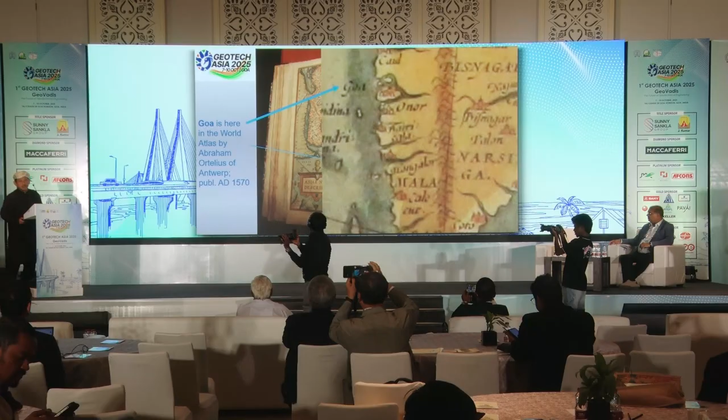Thank you very much for this invitation to this fantastic conference. So today I'm trying to show my gratitude to all organizing committee participants by using this place. This is a gift from Kunebi. So first, this is a part of my personal map collection, published in 1570 Europe, and it shows Goa clearly like this. So we are there now.

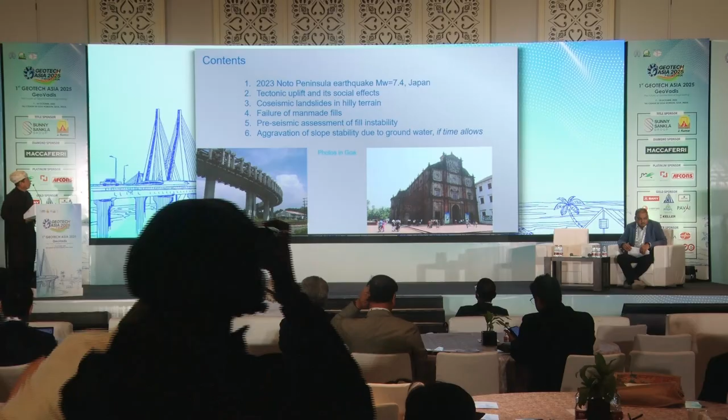And my topic today concerns groundwater effects. This topic is based on my reconnaissance of damage caused by the earthquake in 2024 in Japan. And contents are like this: earthquake overview, tectonic issues, seismic landslides, and after that number 4 and number 5 are my most important concerns. And if time is available, then I proceed to number 6.

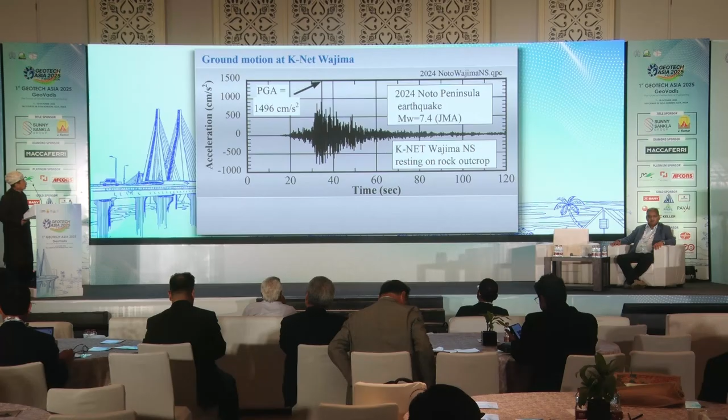So the earthquake happened in 2024 in central part of Japan. And it's a peninsula, rural area, and epicenter is over there. And I address first Wajima city briefly. So this is the ground motion observed by K-net system in Wajima, and maximum acceleration was nearly 1500 centimeters per second squared. And this is a map of Wajima city, and K-net station is located on firm ground. But there is one more station operated by Japan Meteorological Agency. This is located upon soft soil.

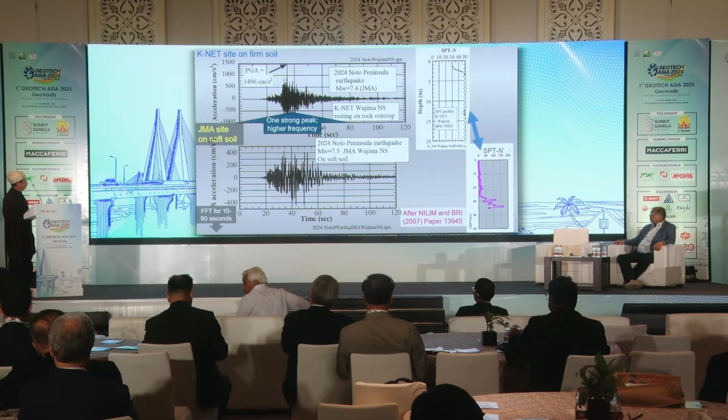So that distance is 0.5 kilometers, and it's interesting to compare motions on firm soil with high SPT N values, more than 50, against the JMA site on soft soil with very low SPT N values. And the maximum acceleration was very much different. But more interesting issue is frequency component. You can easily recognize that the lower time history is slower than the top record. So I address the spectrum by running FFT, and this is a comparison. K-net spectrum shown by blue has much higher frequency component, and JMA on soft soil has lower frequency component. So I understand that theory, soil mechanics, soil dynamics, earthquake engineering are again acceptable based on these observations.

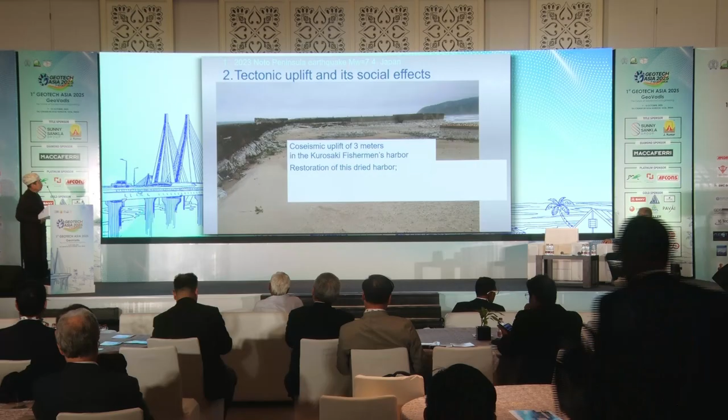Tectonics. In the 20th century, tectonics was a topic in science, geology. But in the 21st century, we encounter the problems caused by tectonics on Earth. This is one of the problems encountered last year. Uplift of 3 meters happened in this fishermen's harbor, and you see that harbor is dry. And it's a big problem to local fishermen communities. So how to restore the community? Digging the harbor bottom is understandable, but cost is a problem. Also, local communities are getting aged, older and older. So financial people claim, what is the reason to spend lots of money to support such aged communities? Aging is a big problem in Japan now, particularly in rural areas. So most small fishermen's harbors are just left like this without any clear decision.

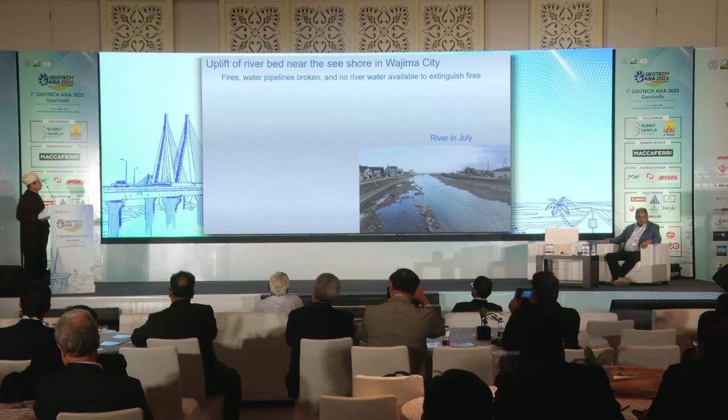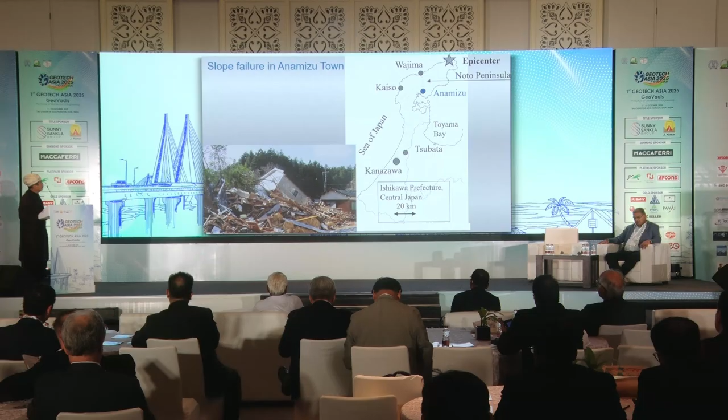And now I'm coming to the problem, the slope problem. So this is the case of Anamizu Town, and this is the consequence. And actually, there was some amount of rainfall prior to the earthquake, about 6 weeks before the earthquake. And this is a detail of the landslide. And my question was, what is there beyond the shoulder?

To date, engineers didn't worry about the construction of such sports facilities at the top of hills. Sports facilities are good for the welfare of local people, there are no questions. But now I suspect that such a big open field is bringing more rainwater into the unstable slopes.

First, there is no vegetation, so rainwater is not absorbed by vegetation. There is no transpiration. The water just remains there and seeps into the slopes. So increased infiltration occurs into the top of the slope.

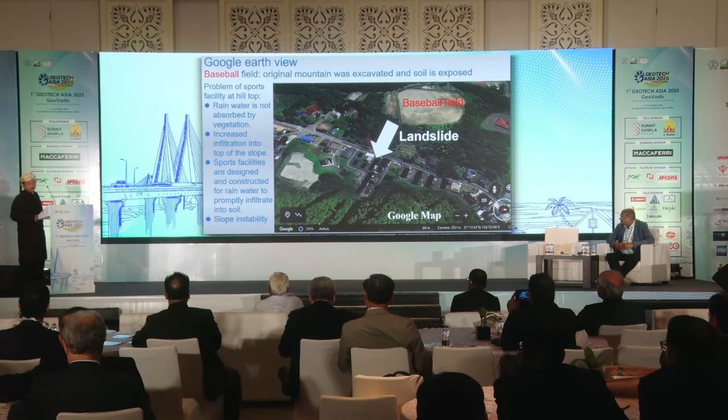Also, sports facilities are designed and constructed for rainwater to promptly infiltrate into soil, so people can start playing baseball or football, whatever, as soon as possible after rainfall. That's good for people, but for slope stability, rainwater is invited to go into the unstable slopes. That's very bad. So we have a conflict between safety and welfare of people.

So this is a view of the baseball ground one month after the earthquake, and five months after the earthquake. Still I was able to recognize evidence of fractures and cracks, also some problems. This is evidence of fracture five months after the earthquake.

And the geological strata is like this, inclined towards the failed slope. The inclination is this way, and I suppose that groundwater can easily flow along the layer boundaries into the unstable slopes. That made the slope more unstable, and then the earthquake triggered the ultimate failure.

So man-made fills cause many problems. This is the Kanazawa City site, and this is the failure of a small valley filled with soil at this high school. So there was a small valley here. It was filled with soil to make some facilities there.

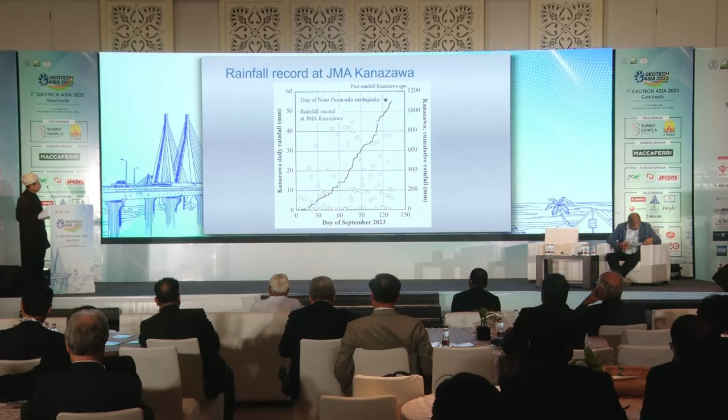I'd like to call upon these issues. What is the meaning of valleys? A valley is a place where groundwater gets together through geological structures, and water starts eroding. That's why we have low places called valleys.

So after valley filling by earth, still groundwater comes to the previous valley. So we need to drain water. That is an indispensable issue for stability. But in most cases, drainage is not enough. Or after many years, we have clogging, etc., and we don't have good drainage anymore.

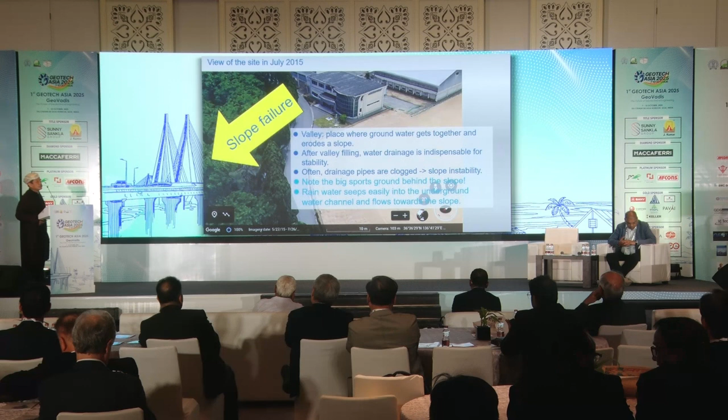So that makes the slope more and more unstable. And then a further problem was the construction of a big sports ground behind the slope. More rainwater started to come into the unstable slopes. So far, we were not aware of this problem of sports facilities.

Sports facilities have been considered good infrastructure. We never dreamed that this affects slope stability problems. Surface not covered by vegetation, that's the issue. So this open area made easy seepage of water into the slope subsoils.

Many people have been talking about liquefaction, the flow failure of gentle slopes like this, so I won't touch upon this issue. But still there are many problems for reconstruction of these communities. Not only engineering problems, but social problems are there too.

The issue is all house blocks move 10 meters, 20 meters, the shape of the site changes. So now the question is, which part of the failed slope is whose property? Registration and survey make lots of disputes among local people. Some people get more land, some people lose land. So there are conflicts. Who pays for that?

How much? Then today I'd like to talk about this Tsubata town, slightly away from Kanazawa city, where a landslide occurred in a recent urban or residential development.

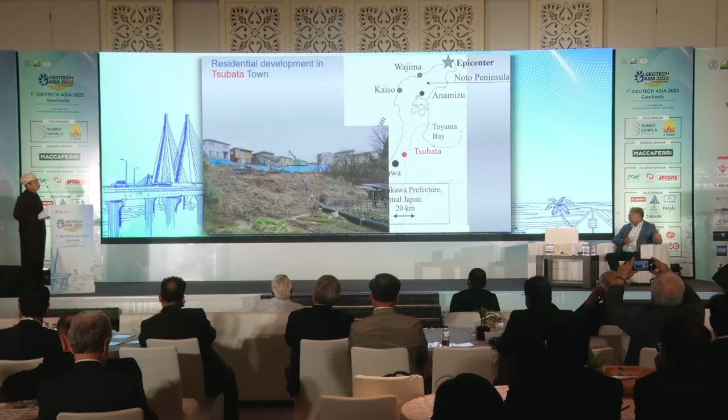I visited this site twice, one month after and six months after the earthquake, and water drainage was always still going on. You can recognize the big pipes, water pipes here. So I understood that there is plenty of ample groundwater behind this slope. Probably one of the sources of this ample groundwater is this reservoir just next to the fill.

Both the residential fill and this reservoir were constructed by stages in the late 20th century, as shown in the next slide. This is a map from 2000, and here there is a reservoir. Next to the reservoir there are many houses, that's the residential area.

And in 1980, there was nothing. It was just hill areas. So development took place between 1980 and 2000 by stages, and in that period, this reservoir was constructed here.

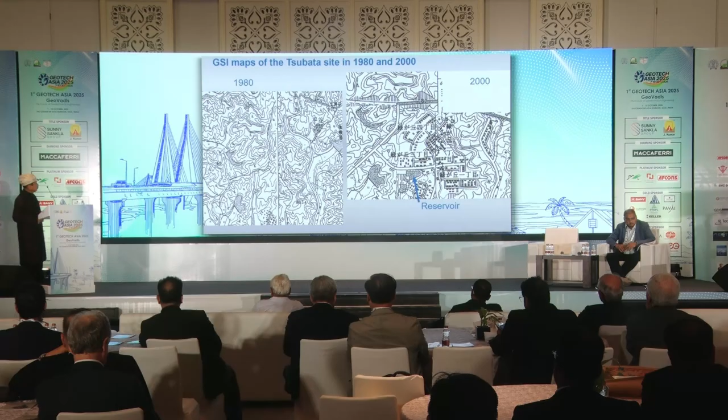So the question is, was it possible to foresee the landslide problems? My answer is yes.

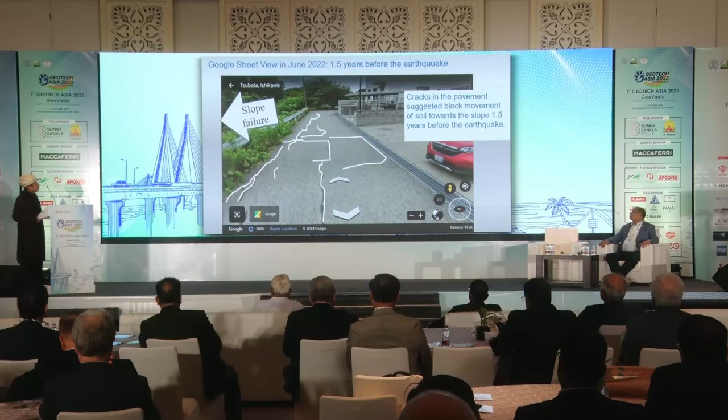I start with this red circle where the landslide happened. These views, I'm very much grateful to Street View of Google Earth - it's quite helpful to understand what happened. You can recognize many cracks on the surface of the pavement, and the shape is like this, and slope failure in that direction. So in my view, cracks in the pavement suggested block movement of soil towards the slope 1.5 years before the earthquake. If local communities or local engineers and officers were careful about the meaning of these cracks, they could say something about the future risk of landslide.

And the typical shape of the crack is something like this. It's not a closed rectangle - one side is open, and the block is moving towards the slope. And this is another side, just a boundary between the slope area and another slope facing the reservoir. So there are some cracks over there.

But more detail - now I'm looking onto the entire road along the reservoir side, and there are some, but not many cracks. The shape again is like this, and maybe this suggested 1.5 years before the earthquake some movement of the slope shoulder towards the reservoir. But fortunately, this part of the slope did not fail during the earthquake.

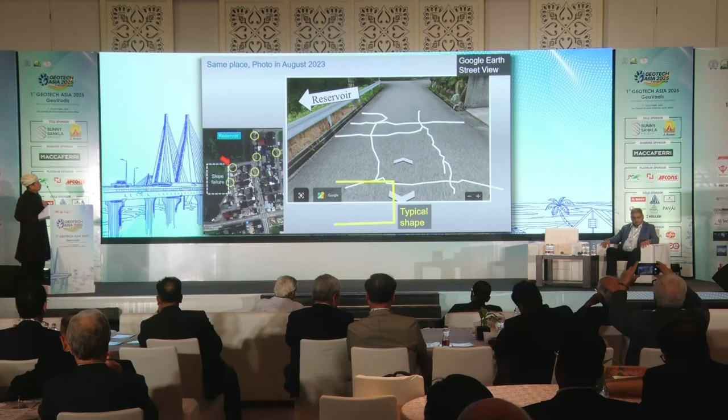One reason is stability was not so bad as in the other previous slope, as shown by the lesser number of cracks. Beyond this section, there are no big cracks anymore - there are some, but not significant. Still, the typical shape is like this. So I imagine that slope was also almost failing, but the factor of safety was 1.00001 and the failure did not happen, fortunately.

Then some people ask me, what is the clear difference in appearance of crack configuration between unstable slopes and very stable ground? So now we look at a place far from the slope, where no slope failure is possible. Still we can see some cracks, but the shape is different. This shape of a crack is a combination of this yellow dashed line and white lines, and in my view, the shape is rectangular - a combination of yellow and white. This set of cracks is caused by maybe shrinkage and subsidence, like shrinkage of pavement and subsidence of backfill. So the shape is different from the previous ones along the unstable slopes.

Let's look at another one shown by red arrows. Again we can recognize many cracks like this - this is not related with slope failure at all. Most probably this is due to subsidence of lifeline backfill soils. Consolidation subsidence occurred there, and then the surface pavement was damaged like this. The shape is never rectangular, never something like you saw before. So even if this happens, you don't have to worry about a slope problem at all.

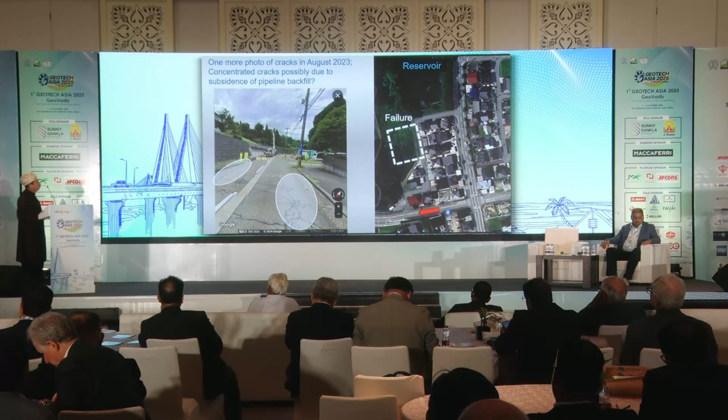So the shape of cracks is good evidence of ongoing slope instability - it's a useful signal. If this happens close to the slope shoulder, then we have to do something to maintain the stability or avoid future earthquake landslides.

And then, limitations. Actually, groundwater has been a big issue in the history of geotechnical engineering mechanics.

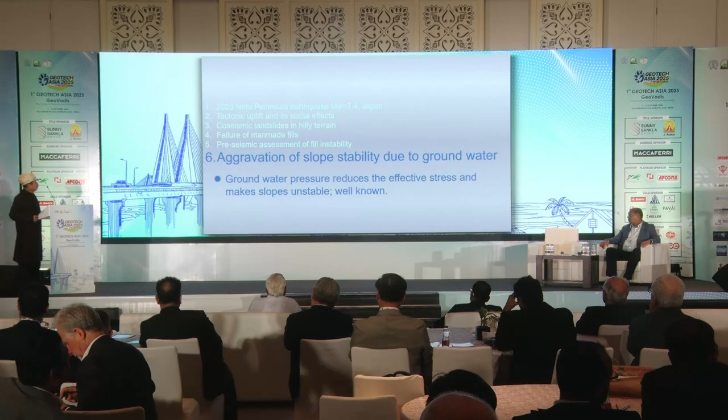Many disasters happened, and mostly our attention has been paid to slope instability problems. But actually nowadays groundwater is showing more problems to our communities. The mechanism of failure is always clear - groundwater pressure, water pressure reduces the effective stress and makes slopes and ground unstable. That's well known. And this negative effect is sometimes unexpectedly serious.

For example, this is a classical example of slope failure in Vajont Dam, Italy, 1963. And this is a consequence - 2,000 people were killed at midnight. This is the Vajont Dam that I visited in 2010. And this is also another interesting picture, Vajont Dam reservoir before failure. So as water level came up, water pressure in the slope increased and the shear strength was lost, and a 200 million cubic meter landslide happened, jumped into the lake and caused a tsunami. So this is the consequence.

But nowadays, we have reservoir-induced seismicities, and India is actually the first observer of this type of disaster. I visited this site in 2016, and it was not an easy trip, but anyhow I was able to take these pictures. Our community should have learned lots of lessons from the effects of reservoir-induced pore pressure rising.

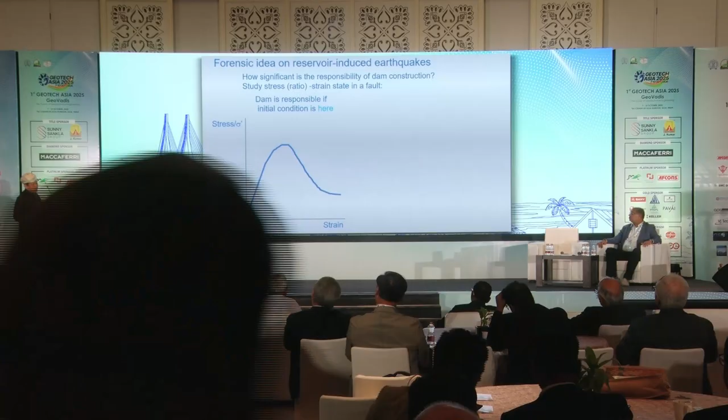So let me plot shear stress over sigma dash versus strain. This is typical fault behavior. We have big stress, failure, and then stress goes down to residual levels. So, is the dam responsible? If the initial conditions are here, at the bottom of the stress-strain relationship, under normal conditions the factor of safety is high enough.

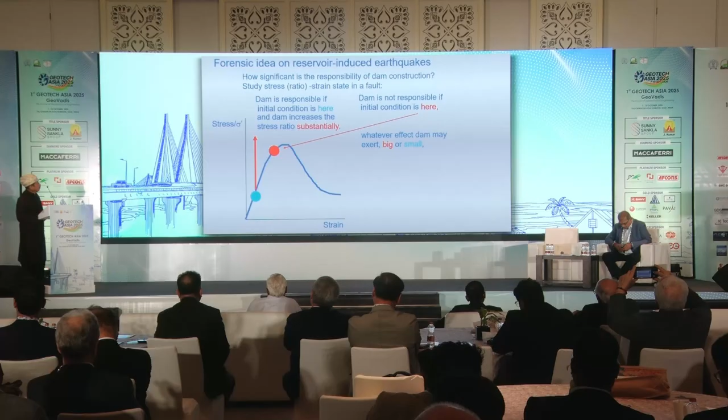And if the dam increases the stress ratio substantially, like this, failure happens in the fault, and the dam is responsible for the disaster. But the dam is not responsible if the initial conditions are very close to the peak stress. Whatever effect the dam may exert, big or small, sooner or later the fault would have ruptured. So the responsibility of the dam construction is much less than in the other situation shown on your left-hand side.

So when discussion starts about the responsibility of dam construction, in order to avoid unnecessary long discussions, we have to show which is the case in reality. So if you plan dam construction in any area, it's very important to do earthquake monitoring. It's very important for owners of dams to start earthquake observations before construction, before impounding reservoirs. You should show which was the case before the reservoir impounding—the blue one or the red one.

Today, our projects span the whole of India, starting from Barmer, Rajasthan. Our team fought extreme heat and sandstorms to install 13,500 piles within a 10-month schedule. Keller accomplished the job, utilizing 9 hydraulic rigs, 10 conventional rigs, and 2 batching plants, ensuring seamless progress despite the harsh conditions. This effort laid the foundation for a new generation refinery and petrochemical complex designed to meet India's growing demand for oil and petroleum.

In the vibrant city of Noida, Uttar Pradesh, Keller undertook the challenge of providing foundation solutions for a landmark commercial center that will soon house luxury hotels, a sprawling mall, and dynamic meeting spaces. This complex project required a blend of 6 techniques: diaphragm wall construction, anchoring, soil nailing, shotcreting, piling, and excavation.

In Khavda, Gujarat, Keller played a key role in the development of renewable energy power, a major step forward in India's green energy initiatives. To provide a stable foundation for this project, we installed 190,000 meters of vibro stone columns. Working in a remote area, we maintained operational excellence and efficiency, completing 19,000 cubic meters of granular blanketing with remarkable speed, laying the foundation for a renewable energy hub that will power a cleaner future for Gujarat and beyond.

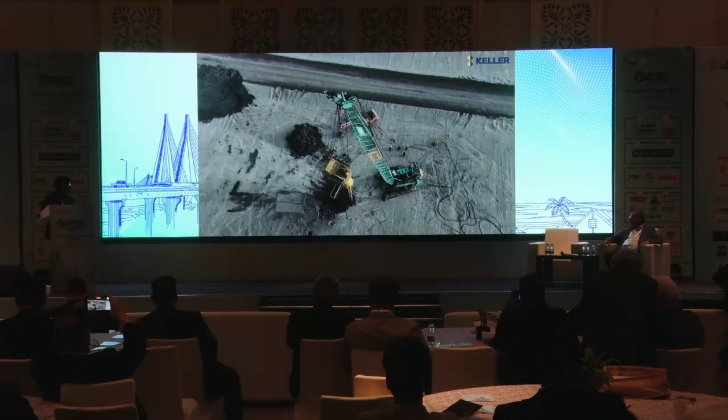At Mundra, Gujarat, Keller is currently tasked with laying the foundation for a massive polyvinyl chloride plant, one of the region's most significant industrial projects. To meet the demanding requirements, we are in the process of executing 30,000 bore piles and installing 5 lakh meters of vibro stone columns. Our team is utilizing 20 piling rigs and 6 vibro setups to ensure efficient progress. This large-scale project showcases Keller's expertise in delivering robust solutions while maintaining timelines and supporting the ongoing growth of Gujarat's industrial landscape.

In Jagiroad, Assam, Keller is contributing to one of India's most ambitious initiatives under the National Semiconductor Policy. Tata Electronics is developing a state-of-the-art semiconductor assembly and testing facility, a project that will place India firmly on the global semiconductor map. To lay the foundation for this world-class facility, Keller is executing 8,000 plus bore piles, each up to 22 meters deep, along with pile testing, excavation, pile chipping, pile cap, and pedestal works. At peak, 21 piling rigs and 22 cranes were deployed, and our team is delivering this large-scale scope in a fast-track schedule. Once complete, this assembly and test facility will stand as a milestone in strengthening the nation's electronics manufacturing ecosystem.

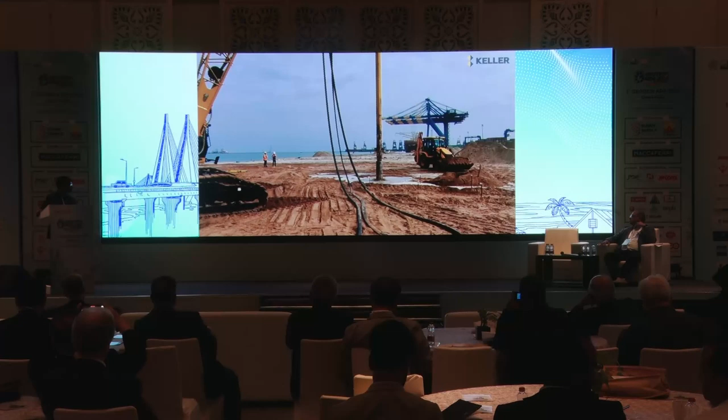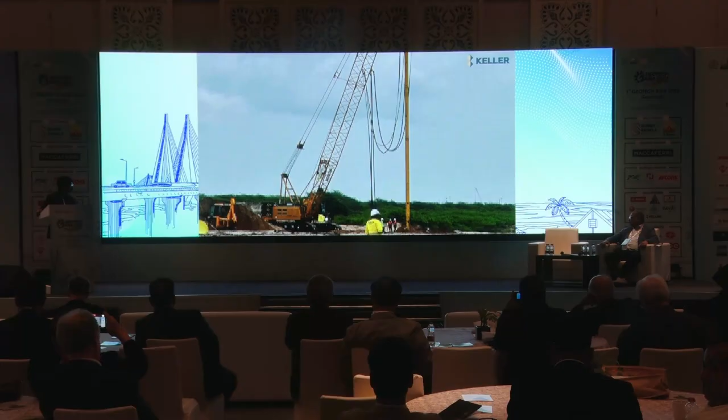At Ennore, for Adani Ennore Container Terminal, AECT, 30 kilometers north of Chennai Port, Keller is engaged in developing the container berth terminal by executing diaphragm wall, barrette piles, bore piles, and deck works. On completion of the works, as it is located strategically, the project offers congestion-free seamless cargo movement, enhancing the economic activity in the Chennai-Bangalore Industrial Corridor.

Our vision is to be the leading provider of specialist geotechnical solutions, to lead in expertise, quality, product range, and customer service, and to consistently outperform our competitors. Putting this into practice are 3 core values: integrity, collaboration, and excellence.

At Keller, safety, quality, and sustainability are at the heart of everything we do. We are committed towards a zero-tolerance policy for avoidable harm through proactive risk management and continuous improvement. These empower us to deliver safe, high-quality foundation solutions across Asia and beyond, building not just structures, but trust and a sustainable future. Our sustainability approach is centered around Keller's 4 Ps: planet, people, principles, and profitable projects. Thus, through continuous improvement, we strive to make a positive impact on society and the planet.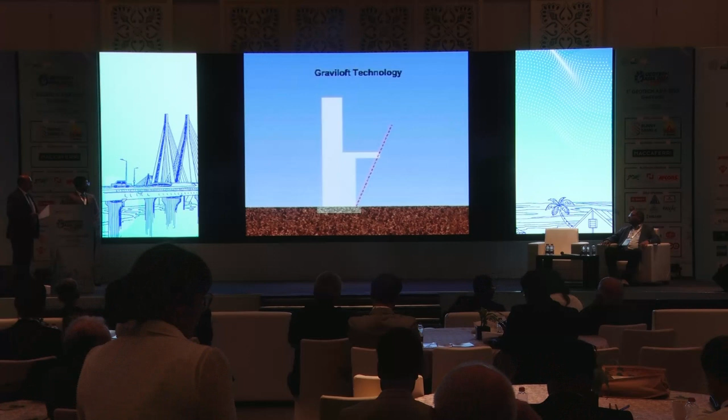Then, construction of the wall is carried out in stages with the process of simultaneous backfilling. Once the construction of the wall reaches the designed height, an RCC loft is laid like casting of a raft on the already placed backfill. Now is the crux of this technology. The erection of this loft into the failure plane breaks the shear failure pattern, giving birth to a new shear failure plane, which originates from the intersection of the loft and the new retention surface. The balance construction of the wall and backfilling is then carried out.

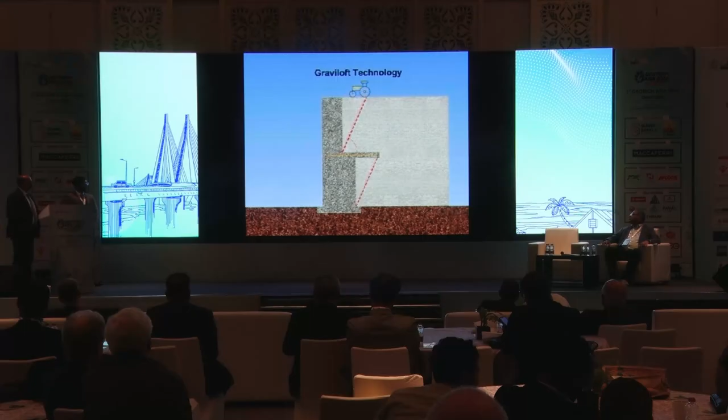In multi-loft Graviloft construction, for heights of more than 6 to 7 meters, multiple Gravilofts can be provided accordingly. This merit gives Graviloft technology utility for much greater heights. Interestingly, as the height of retention increases, the percentage of saving due to adoption of Graviloft walls increases.

When there is no loft, the lateral earth pressure diagram is a single triangle, and base pressure distribution is triangular, giving more pressure intensity towards the toe. In Graviloft technology for a single loft, earth pressure is in the form of two reduced triangles, and the pressure is either uniform or trapezoidal, which exploits the full bearing capacity of the foundation and eliminates the possibility of tilting or uneven settlement. The backfill, which is responsible for generating lateral thrust in Graviloft walls, is the unstable soil mass above the shear failure planes.

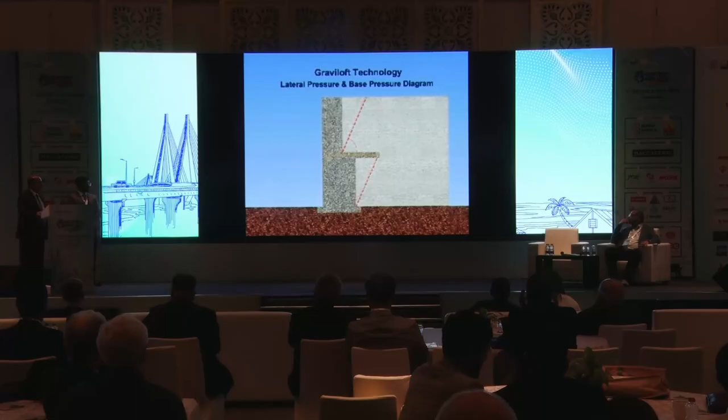I'd like to proudly mention that the next video is an outcome of our continuous research journey. And Mallar, after his graduation from UC Berkeley, has added a feather in our organization, and that is nothing but the next generation, please.

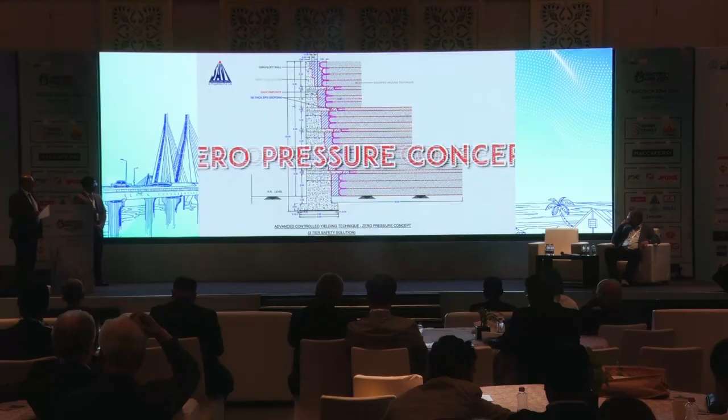Savi Infrastructure and Properties Private Limited, holders of Graviloft technology, are exclusive retention solution providers for the last 21 years. They had come up with a proposal for a 3-tier safety solution, namely Advanced Controlled Yielding Technique, Zero Pressure Concept, with due consideration of the importance and solidity or sound solution desired.

In this technique, the retaining wall is designed for various factors of safety with Graviloft technology as the first tier of safety. In the second tier of safety, provision of the wraparound technique yields strength to the backfilled material, resulting in minimization of lateral thrust on the wall. In addition to this, provision of geofoam EPS 150 between the Graviloft retaining wall and the wrapped-around backfill will act as a buffer or cushion to create a zero pressure effect on the wall as the third tier of safety.

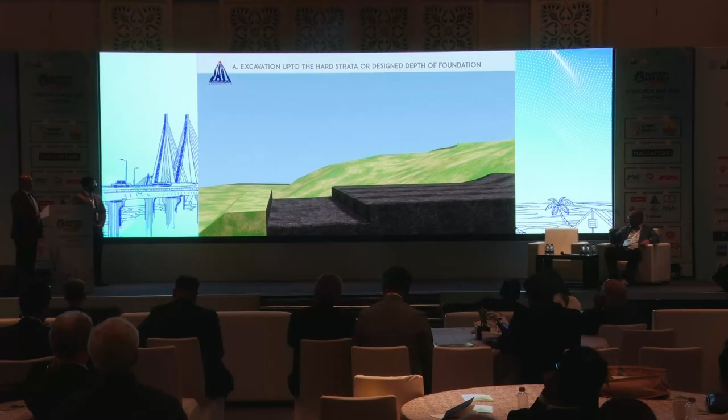This graphical presentation is to elaborate the methodology of construction as follows. Excavation up to the hard strata or designed depth of foundation. Laying lean concrete for leveling. Casting of the raft as per design. Casting of the first lift with provision of weep holes. Fix geocomposite as filter media for the first lift height on the backfill side.

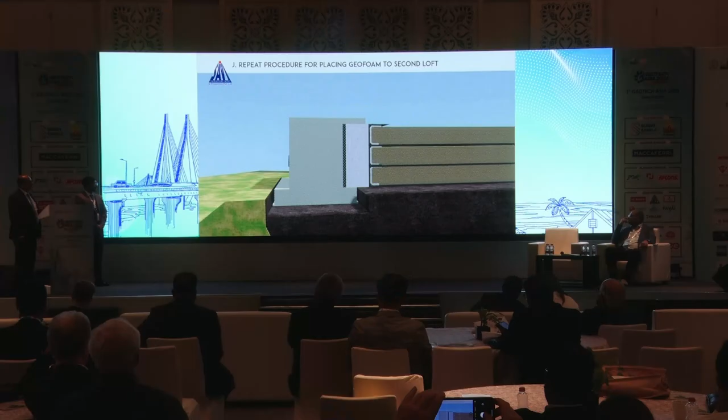Place geofoam EPS, laying of a geogrid and geotextile. Backfilling in layers to a height of 1 meter, watering and compacting to the desired density. Wrap around the geogrid and geotextile. Repeat the procedure for placing geofoam up to the second loft. Cast the RCC loft as per design. Repeat the procedure with casting of the next lift of the wall to achieve the desired height of the proposed retaining wall.

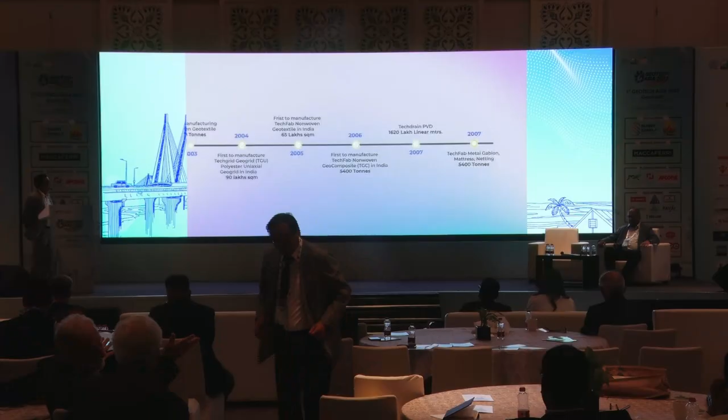TechFab India has been servicing the nation since 2003 by aiding the construction, design and implementation of dependable, cost-effective and easy-to-build infrastructure with world-class geosynthetic goods and geohazard mitigation services. From humble beginnings, while setting up the manufacturing facility for woven geotextiles in Silvassa and Daman, and rockfall protection system in Haridwar, we have rapidly grown to become the largest manufacturer of geosynthetics products and geohazard mitigation systems in India today. TechFab India, through their commitment, capability, enthusiasm and the willingness to do things differently, have achieved incredible results for clients through the years.

TFI started exports to a global market and carved a prominent niche as a prime manufacturer with its array of unique products. The vision is to offer excellent quality products and services and thereby serve the growing needs of infrastructure development in India. At the heart of geosynthetic activity and at the heart of geohazard mitigation activity lies our intense persistence to innovate and introduce world-class products every year. We are the only Indian company manufacturing the widest range of products. Even when it comes to international markets, only few offer such a diverse and dynamic range, and thus TechFab India stands out.

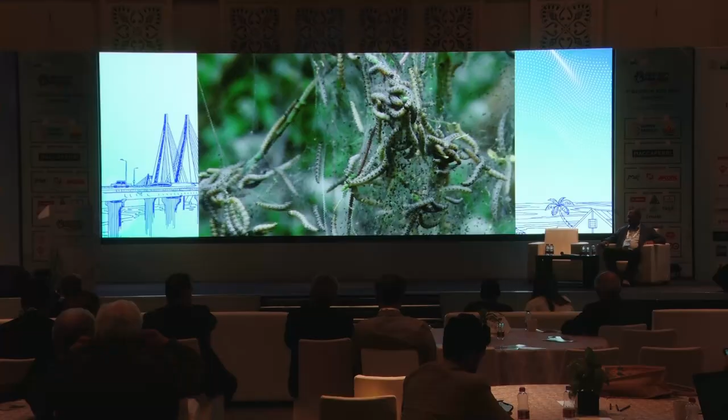To meet the needs of the present without compromising the future, infrastructure must evolve. It must become smarter, more efficient, and above all, sustainable. This is especially critical in areas like rockfall mitigation and coastal protection, where infrastructure not only supports human activity, but also stands on the front lines of natural hazards. By adopting eco-friendly materials, low-impact engineering, and nature-based solutions, we can design protective systems that are both effective and environmentally responsible. Sustainable infrastructure isn't just about building stronger, it's about building wisely, in harmony with the environment, and with a long-term vision for resilience and balance.

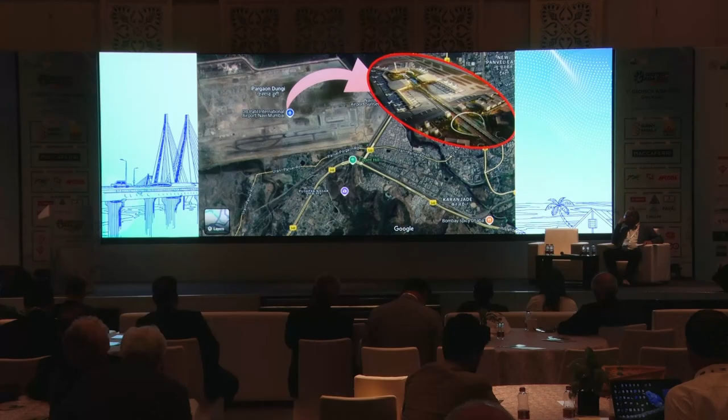A shining example of this commitment is brought to life by the Garware Design and R&D team, which proudly presents its advanced rockfall monitoring system, RODLAMS, successfully implemented for CIDCO, a government body tasked with the monumental challenge of delivering Mumbai's most anticipated second airport. The very first obstacle was relocating 2,786 households across 10 villages. The only available site was a vast, abandoned quarry with unstable, unprotected slopes, boulders, and scree presenting hazards in residential zones adjacent to former mining rock cuts. Hence, mitigation measures are critical to ensure safe and sustainable infrastructure development.

A serious safety risk to residents, CIDCO allocated 20 crore rupees for installing rockfall safety nets to prevent falling debris. Garware is honoured to have been chosen to carry out the prestigious and extremely challenging work by CIDCO. Garware in this project has successfully accomplished an exceptional feat by completing over 3,000 running meters of anchoring, drilling through one of the most dense and unyielding basalt bedrock formed by extensive volcanic eruptions that created the Deccan Traps between 68 and 60 million years ago, and laying over 8,500 square meters of drapery consisting of double-twisted hexagonal mesh and high-strength boulder net.

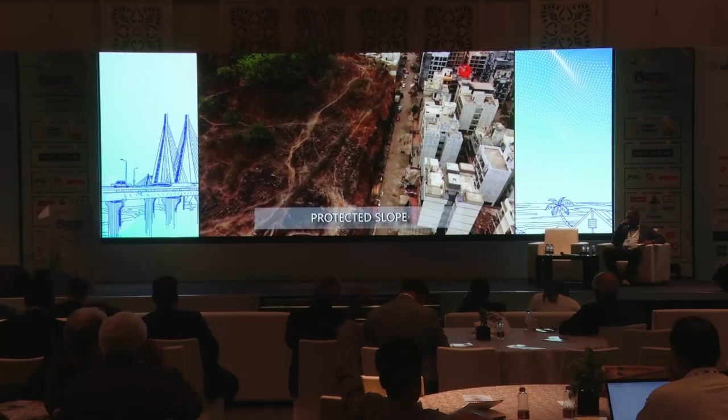The project presented its own unique set of challenges, including steep slope, hard-to-reach working areas and harsh climatic conditions, but through meticulous planning, seamless coordination, and a commitment to safety with zero reported incidents, Garware successfully completed the monumental task in a record time of just 6 months. In a landmark move for rockfall protection, Garware unveiled RODLAMS, the innovative early warning system in this project, setting a new benchmark in slope safety.

By harnessing real-time data and advanced sensors, RODLAMS delivers early warnings and rapid response capabilities with unprecedented precision. When paired with conventional drapery, it becomes the ultimate safeguard, protecting lives, infrastructure, and the environment with a level of reliability that's truly the cherry on top for modern rockfall mitigation systems. Garware's RODLAMS system, integrated with conventional rockfall drapery, sets a new standard in slope protection and monitoring.

Featuring IoT connectivity and a machine learning module, it enables real-time remote monitoring with minimal maintenance. Developed by Garware and certified by IISc Bangalore, it marks a key milestone in infrastructure safety. Now fully deployed, RODLAMS is transmitting live data to CIDCO, enhancing early warning and proactive risk management.

The core of the early warning system is an advanced sensor interface that continuously captures real-time data on slope displacement and stress variations. This data is visualized through dynamic graphs, allowing engineers to track trends, identify anomalies, and respond proactively. The intuitive dashboard translates complex sensor outputs into actionable insights, enabling timely alerts ahead of potential rockfall events.

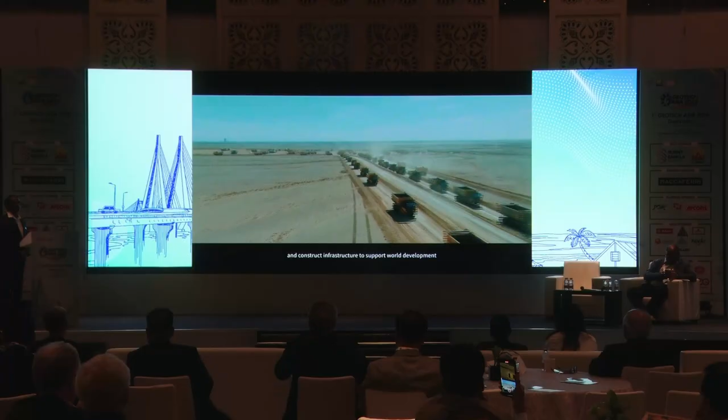In August 2002, 2 motor graders were shipped to Morocco, marking the beginning of our global journey. After more than 2 decades of diligent effort, our overseas sales have steadily risen. In 2023, our overseas sales revenue reached $7.3 billion, accounting for nearly 40% of the total income. In over 180 countries and regions worldwide, we have established more than 1,700 service outlets, 900 spare parts warehouses, and 4 R&D centers. Outside China, SANY has built 15 industrial bases in places including the US, Europe, India, Brazil, and Indonesia, and 46 intelligent manufacturing plants around the globe, 2 of which have been rated as lighthouse factories by the World Economic Forum, enhancing our global manufacturing capacity.

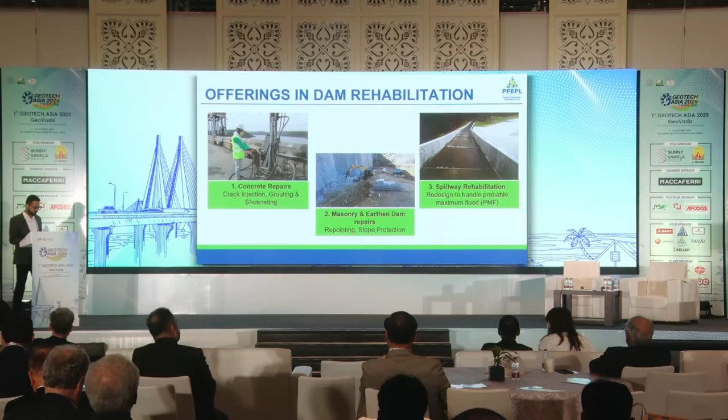We provide construction and rehabilitation solutions for aging dams, where we do concrete repair works, leakage prevention works for masonry and earthen dams, and spillway rehabilitation works. We have been working with WRD Maharashtra on some of the major dams in the region, where we have done pressure grouting and curtain grouting measures for seepage control.

Some key projects I would like to highlight - this is very important, and we like to present it across all of these case studies.

The one you see right now on screen is a 10,000 kilojoule rockfall barrier. This was the first in Asia to be installed at a height of 70 meters above the road level. The access road was very narrow, just a 2-lane road with difficult terrain, in the region of Malshej Ghat in Maharashtra, where you have excess rainfall because it's in the Konkan region. It was an extremely challenging project.

This is one of the most challenging projects and terrains we have worked in. We were successfully able to install and get the solution in place, because there were a lot of landslides and rockfalls happening in this region, with multiple incidences of a state transport bus being washed off because of a boulder that had come from the top. Our solutions have been working and preventing such disasters.

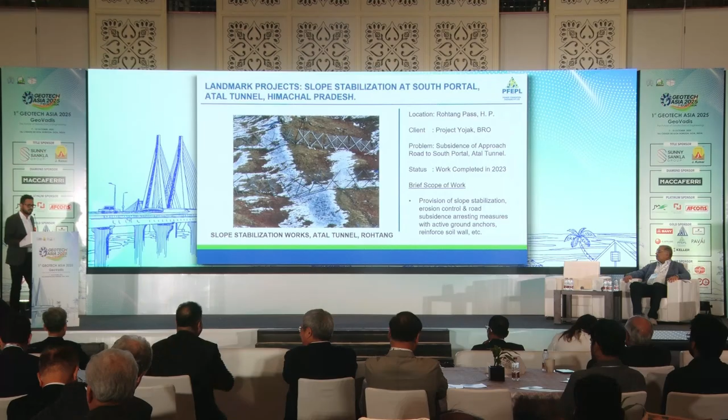The third one is another remarkable achievement - Asia's tallest hybrid earth retaining structure, standing at 102 meters high. This was at Tindharia, West Bengal.

As you know, Himalayan mountains are primarily baby mountains, and they collapse easily. So this was a notorious site where the entire mountain was moving. That's where we came into the picture. We started the analysis, came up with a detailed plan, and went right from the bottom to the top, securing the entire landmass with a structure built with rock anchors, along with other hybrid retaining structures built around the area.

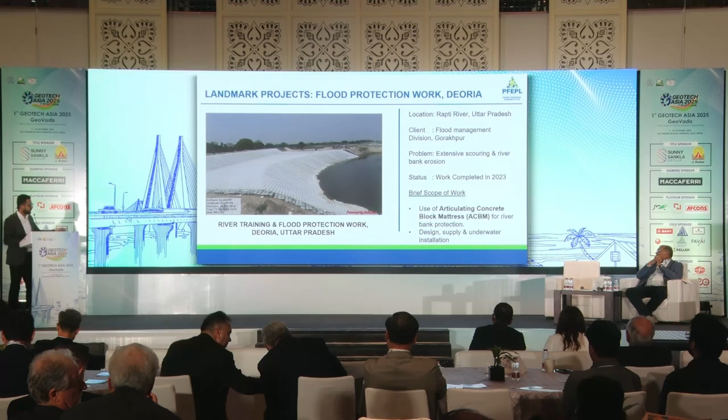Just a couple more projects - we have done Arunachal, and leakage control measures for Tengar Dam and Bhatsa Dam, where we successfully covered leakage prevention works. And some river erosion control measures back in UP, where we carried out bank erosion control measures. Thank you so much, it was great presenting in front of you.

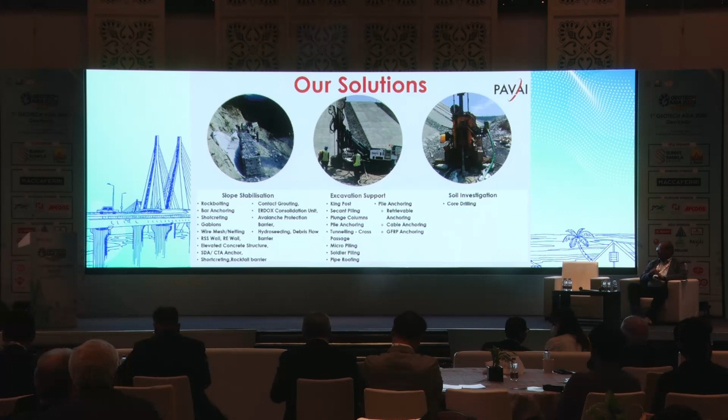PAVAI offers core geotechnical services, including slope stabilization, excavation support, and soil investigation. These are critical for ensuring structural safety and long-term stability in challenging terrains. At PAVAI, we enhance ground performance by improving bearing capacity, controlling seepage, and protecting the environment. Our solutions ensure stronger foundations and sustainable project outcomes. We serve infrastructure across highways, railways, tunnels, power, water, and defense sectors throughout India.

PAVAI began its journey in 1976. Over the years, we've steadily evolved into a trusted name in geotechnical engineering, serving national infrastructure needs. Our growth is marked by milestones of innovation, expansion, and excellence in execution. Over the years, PAVAI has achieved remarkable milestones.

Made in India, made for India. At PAVAI, our commitments define who we are. Over the years, PAVAI has earned the trust of some of the most respected names in the industry. Every project we deliver is a reflection of our expertise, precision, and dedication. At PAVAI Infra Geotech, where PAVAI means change, every challenge becomes an opportunity to create transformation. We believe that every structure we strengthen contributes to building a stronger nation. Each image you see here represents not just engineering, but effort, innovation, and excellence.

PAVAI Infra Geotech is a trusted name in geotechnical engineering, delivering end-to-end solutions for infrastructure projects. With decades of experience, we are known for our reliability, quality, and commitment to client success. Thank you for your time. For collaborations or more information, connect with us at www.provigeotech.com.

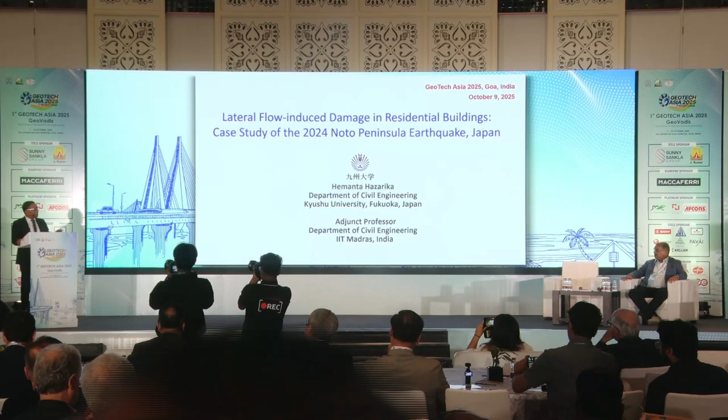Good afternoon to all of you. First of all, I'd like to thank the organizing committee of Geotech Asia 2025 for providing me this opportunity to deliver this lecture on the earthquake in Japan in 2024. Before I start my lecture today, okay,

there is a legendary artist and singer called Zubeen Garg from the northeastern state of India, Assam, where I come from. On September 14th, after 3 years of no connection, I got a WhatsApp message from him saying that there is an earthquake in Assam, in Guwahati.

And I had a communication with you. I showed you some of my private communication, some of which I deleted. This is the message from him on September 14th.

Why I'm talking about this today is that he was very much concerned about earthquake resilience of our country's infrastructure. He always encouraged me to do something for the state and the country, and always talked about earthquakes with me. He was also a very influential person in state politics.

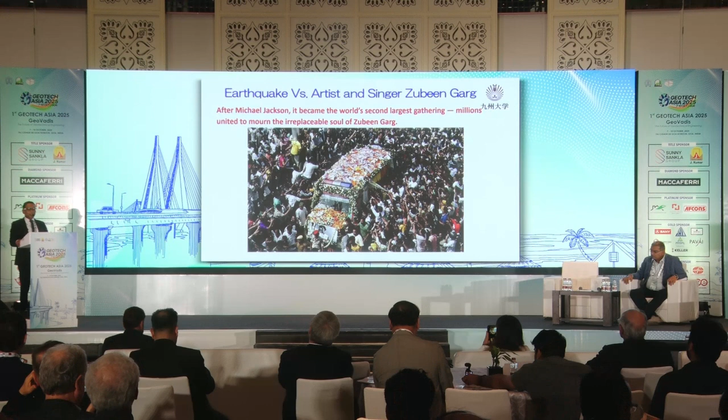This is very interesting. Just 3 days ago, 20 different people sent me this Facebook post, which I wasn't even aware of. In this interview he talked about earthquakes. He talked about me. He talked about Japanese culture and Japanese wives, because my wife is Japanese, so he knew about that well. That's probably the reason he talked about it. I'm very glad to share this.

I have a special request to all of you here. If you can spare 30 seconds of your time, please stand up to show our condolences to the family and for his departed soul. I'll say start, and then you can begin. Okay, thank you. Please start.

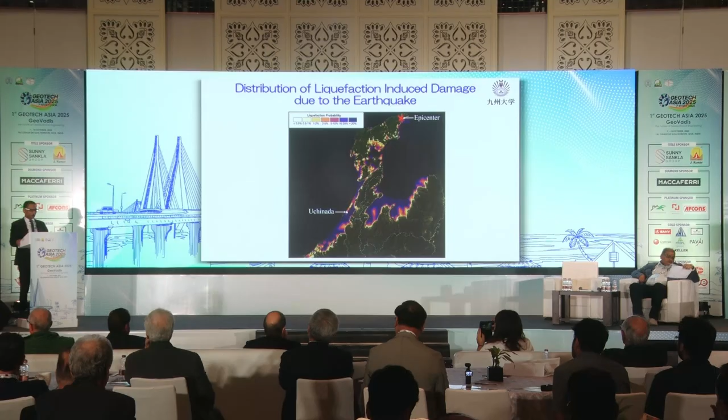This shows the distribution of liquefaction affected areas. You can see there are many areas around Ishikawa prefecture, where the epicenter is located, and in the nearby Niigata and Toyama prefectures, which had lots of liquefaction-related damaging failures.

So we decided to form a forensic investigation team under my leadership, with academia, industry, and government. These are my colleagues. I think Professor Matsumoto might be here. He is from Ishikawa prefecture, so he helped with the logistics of my team.

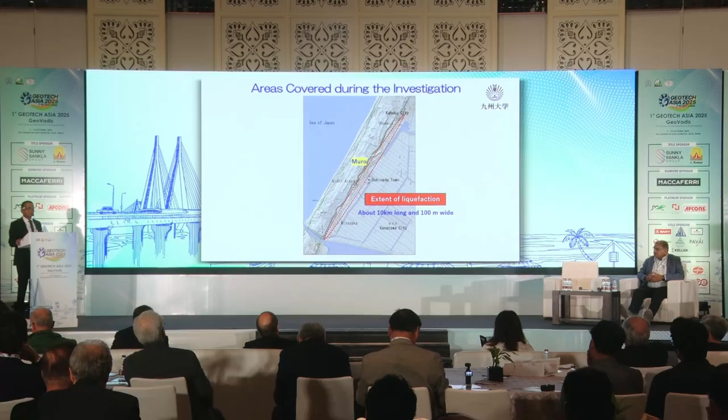We performed two investigations, once in February and once in August. We especially focused on liquefaction-related damage in Uchinada town, about 100 kilometers from the epicenter. You can see the extent of the liquefied area, about 10 kilometers long and about 100 meters wide.

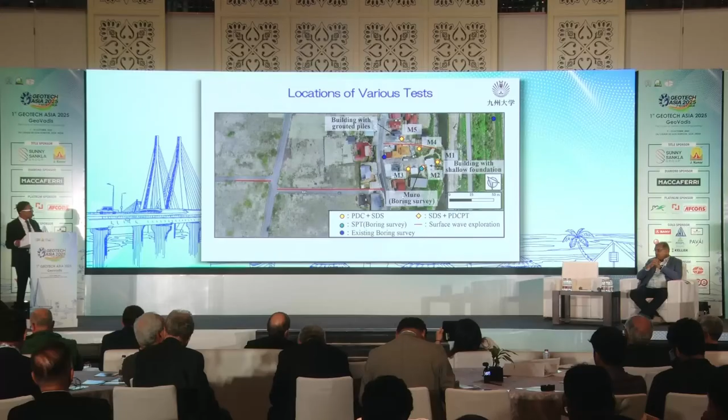So we perform these different types of tests. I'm not going to go into the detail of this test. If you can just remember the PDC, PD, SDS, PDC, SWE, and standard SPT. These are the different locations where we perform various tests. This is the house building with grouted piles. This is the house with shallow foundation. So we just concentrate around these areas and perform different tests as shown here.

So I'll show you some results of our study. This is the house. They were still living even after the earthquake. And of course, the compound wall was moved by about 1.6 meter and the soil settled by about 1.7 meter. You can see the piles here, grouted piles, and you can see the areas here, 1.7 meter of settlement. But there is no damage to the house at all, no movement at all. You can see the details here.

So, we performed many forensic investigations, as I mentioned before. One is that we perform this dynamic cone penetration test after the earthquake, which is shown in blue here. And we got the original boring data before construction from the owner, and you can see the difference in the strength of the two results. Also, the original ground surface was here, because 1.7 meter of the soil has gone because of the lateral spreading. So we could perform only from this location. So you can see this.

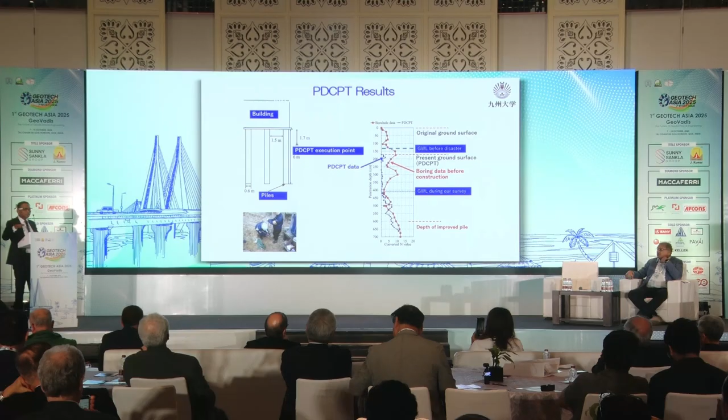Then there was a groundwater level difference before and after the disaster. One interesting thing is that this same test we conducted in August, about 6 months later, and you could see some rebound of the strength, same soil, after 6 months.

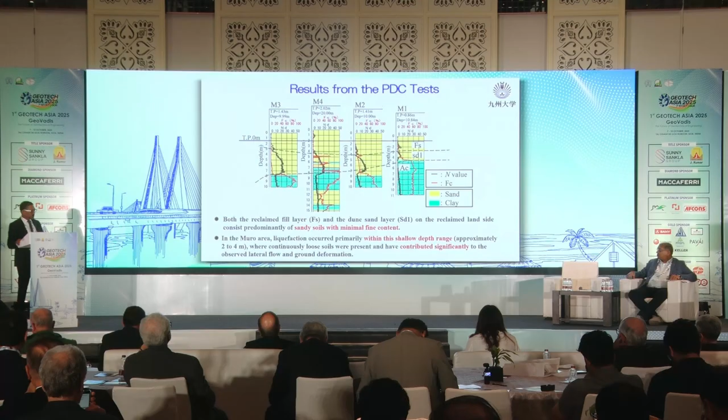And these are the results from our PDC test. I'm not going to go into very details because of the time limit. I'd just like to conclude that from our test, these N values and fine content, and these colors represent the types of soil. That's mostly sandy soil with minimum fine content, and the liquefaction occurred primarily within this shallow depth of 2 to 4 meters. Okay? This is our conclusion based on the PDC test, and let me go to our analysis based on our investigation.

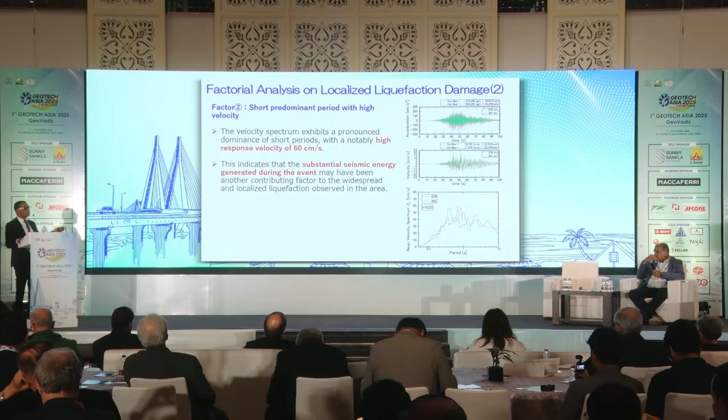First, why liquefaction took place in that area, which is 100 kilometers away from the epicenter? One is that we found that there is a thick layer of clay of 15 meters in that area, and probably that might have amplified the seismic motion. That is one reason. Another one is the response velocity spectrum, if you look at here, it has a high response velocity of 60 centimeters per second, and substantial seismic energy generated during the event. So it might have led to the liquefaction with a predominant short period motion.

Third one, as I mentioned before, it was a landfilling area with a high water table. So we also observed during our...

Request to conclude, please. Yeah, give me 1 or 2 seconds. 2 minutes, okay? Thank you so much.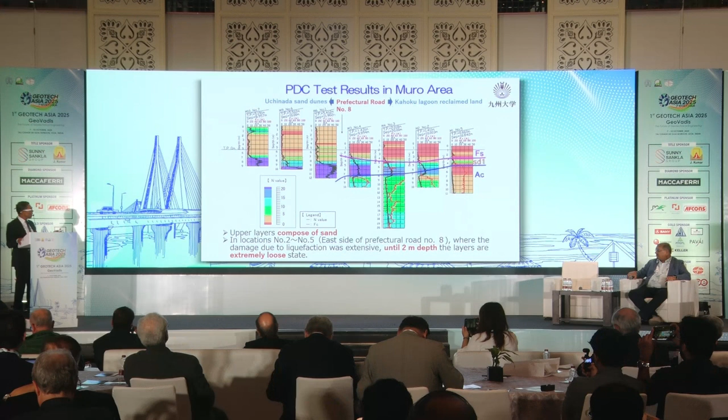Some drainage basin indicating groundwater level was very high. And this was the boring investigation we performed individually. And you could see that there are filling here, sand dunes and alluvium here. And also these are the PDC results which I already showed you before in the area. We'll skip this one. And this is the surface wave exploration results, which shows that along this road, prefectural road, this side and this side show significant difference of the shear velocity. So this led to the liquefaction.

And finally, liquefaction took place at a shallow depth. This is an evidence. There is the one town Professor Tohada mentioned, Wajima and Suzu city. Here you can see the upliftment of the...

Just 1 minute. Yeah. Thank you very much.

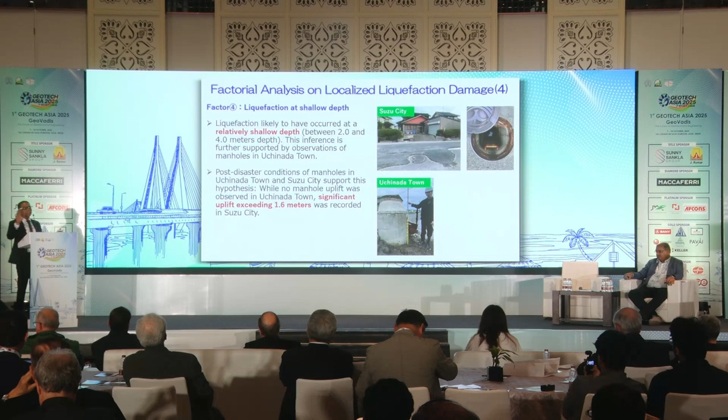Upliftment of the Uchinada town and Suzu city. You can see the difference, that it took place at a very shallow depth because there is no upliftment of the manholes. Okay? And finally, this is one evidence that the road here, the prefectural road, prevented the lateral displacement somehow. Okay? That is one factor.

And finally, there are many voids in that building, and the owner sent me this picture a few months ago that finally he has to put some sheet pile walls and concrete mixture to avoid any disturbance of the structure in the future earthquake. Okay?

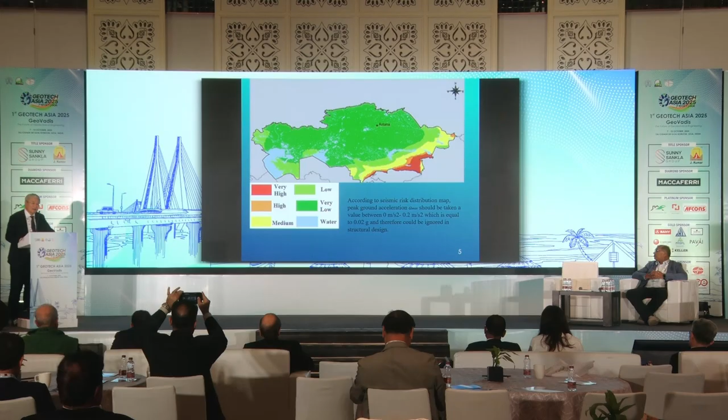So many buildings, unique buildings, master plan designed by Kurokawa of Japan, and many foreign architects like Foster, and also from Italy, from Turkey, many bridges. Already 5 bridges are done, another 5 bridges under design. So this is one mega project, Abu Dhabi Plaza. It is one of the biggest in Central Asia, about 80-floor buildings.

So you can see this is the site working, and the first experience was about 20 meters. We have excavation space for car parking. You can see this construction site. We worked together with the Arabtec company, together with CCC. So these are some foundations of this area, 25 meters in depth.

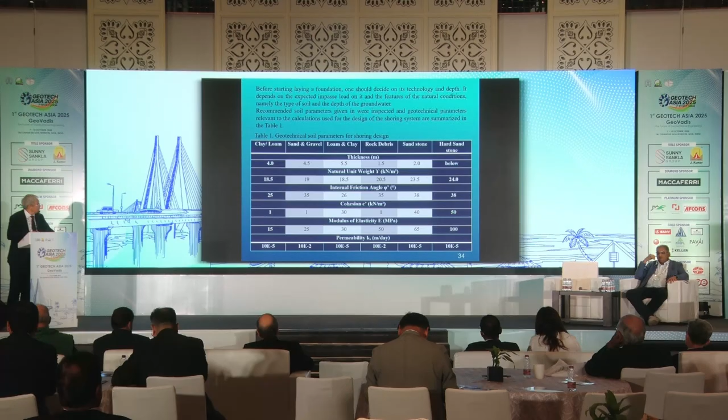Regarding this project Abu Dhabi, you can see this soil ground, some sandwich soils. So finally, at the bottom of the piles we found some stone. This is also a geotechnical survey. The client requested us to make a geophysical report for understanding the behavior of the soil layers. So we also used software, the 2 programs I already told. You can see this is the settlement of different blocks of Abu Dhabi.

So the second mega project, light railway transportation, is now under construction. At the end of this year it will be finished, connecting the new railway with the new Astana airport. So we have these projects already finishing. You can see these foundations, with depth about 55 meters in some places, diameter 1.5 meters. So we made the construction in different seasons.

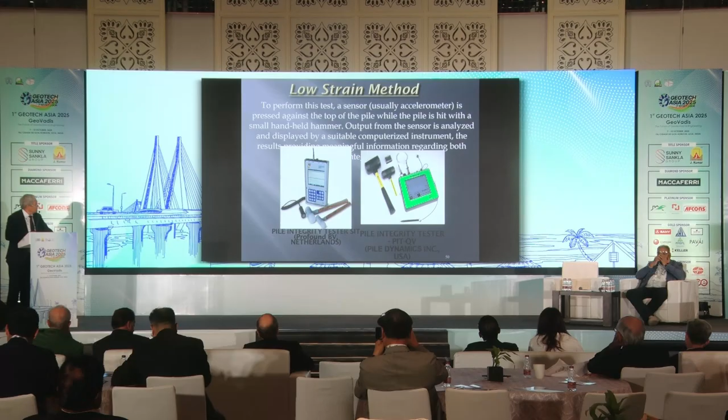Also our client requested us to check the integrity for defects in the body of the piles. So we used low strain methods like the pile integrity test and cross-hole sonic testing. This is our PhD students' work, very well. Very quickly, these are good piles without any fluctuations, bad piles with fluctuations. The cross-hole sonic has very good results because we detected multiple defects in comparison with the pile integrity test. It's a different philosophy of testing.

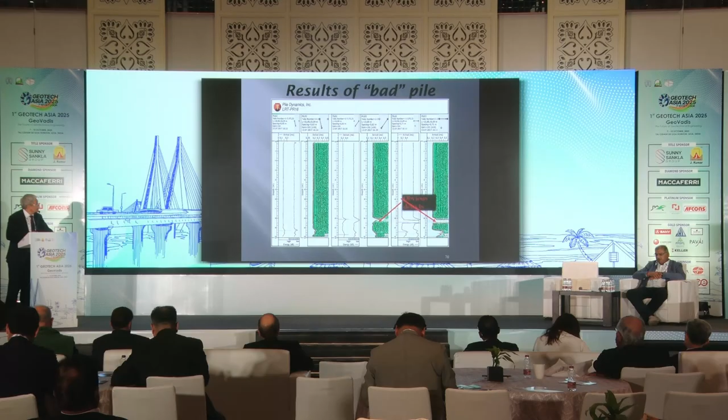So these are good piles without any cracks. These are bad piles with about 2 cracks. You can also see some positive and negative points of the pile integrity test. You can only detect 1 crack, and after 1 crack, you cannot detect other cracks. But with cross-hole sonic, you can find multiple defects.

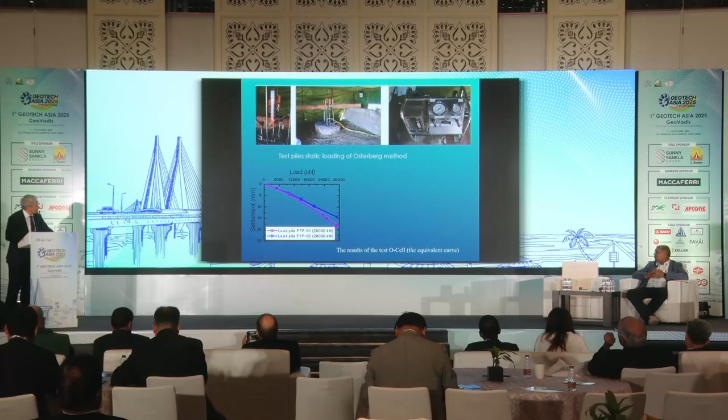So this third mega project, Expo 2017, we are already finishing. This is one of the interesting phenomena for us. We used the Osterberg test, because we have more than 3,000 ton loading. It was also a first experience. So we compared with the United States standard, the American standard, and used the Osterberg test for high vertical loading.

And this is the conclusion: load testing is now very developed, especially for high-rise buildings. Also we developed pile integrity and cross-hole sonic tests for detecting defects in the body of piles. And also we made dynamic tests for obtaining dynamic bearing capacity using PDA, depending on the soil ground.